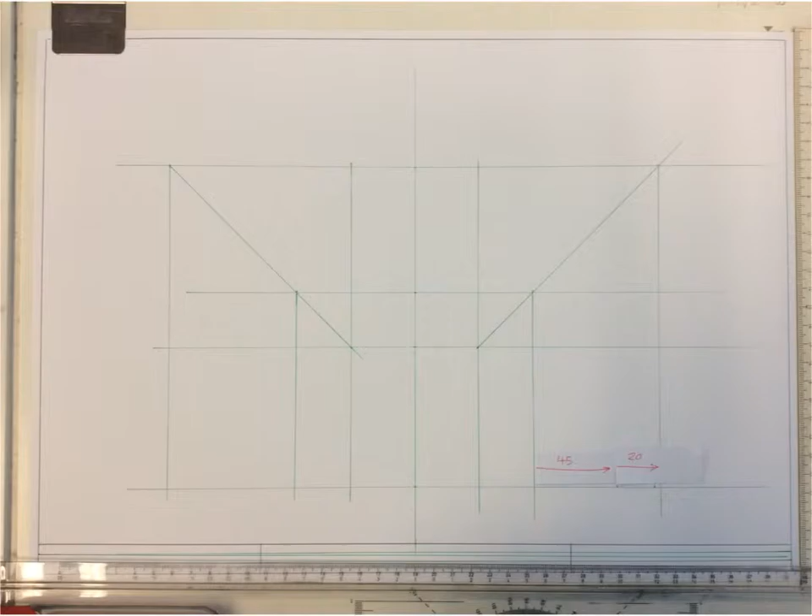Measure up the two edges 40 millimeters and 35, and then you want to draw a vertical line from that measurement there that you made initially, and then a mark up there matching your measurement down the bottom.

These angles that you're going to draw now are going to not use the T-square and set square together, but you're going to be joining up points. So you have made a mark up the edge which you need to mark off along this line here, and then you're going to join up that point and that intersection with this angled line.

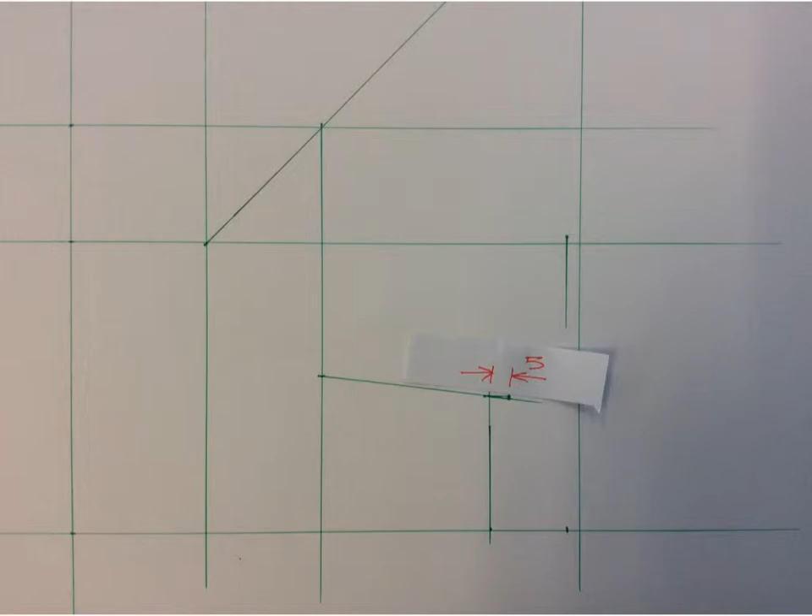And you're going to measure 5 millimeters along this line here, so that the next step is going to be joining up these two lines here. So this chair is drawn scale 1 to 10, so this 5 millimeters measurement is actually representing 50 millimeters, so 5 centimeters. So this is the width of the chair base which you would sit on, and this is the chair back.

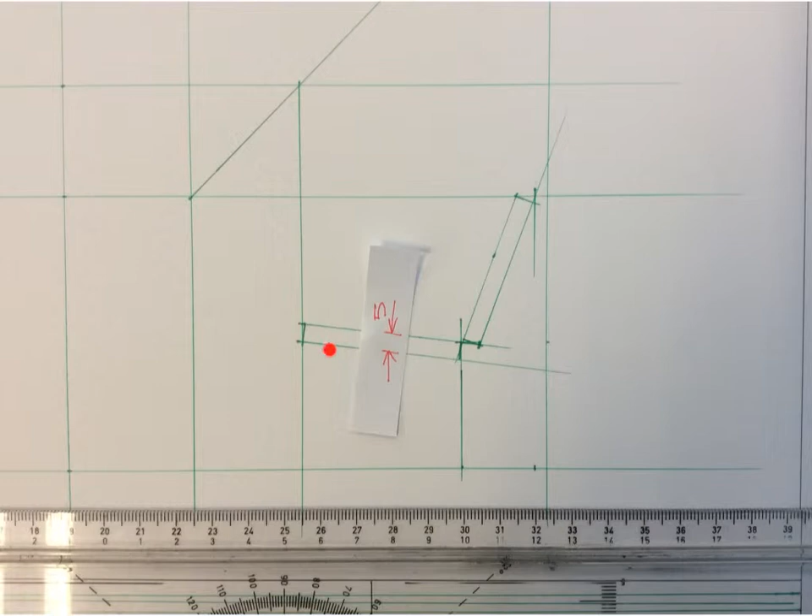So you are going to use parallel line technique with your T-square and set square together to get those lines nice and parallel, and with that trick you can also get vertical lines that are vertical off the angle, so perpendicular, which your teacher will teach you within class time.

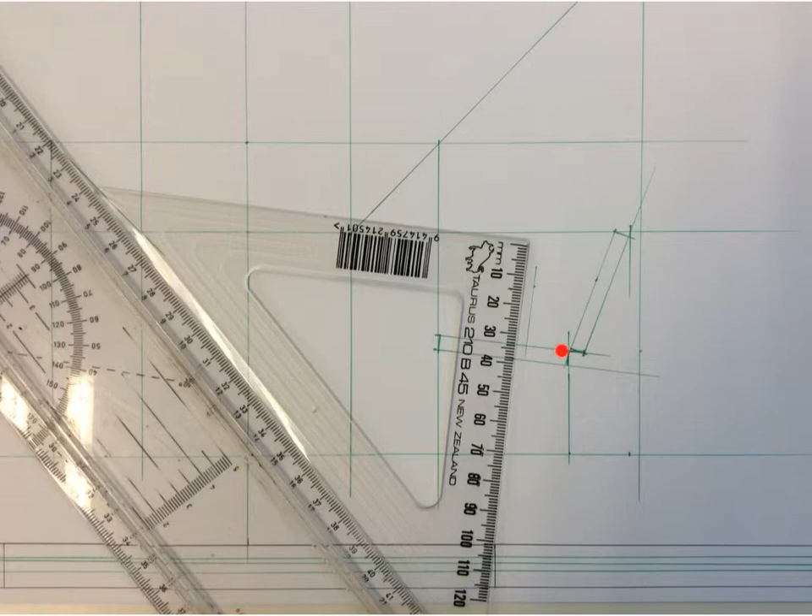Here you can see a snippet of the T-square and the set square sitting on top to give me the vertical line that is perpendicular to the angle which has been drawn here. So that is just giving me a vertical line drawn off the seat anywhere, so that then I can mark 20 millimeters off it. There's that 20 millimeters measurement, and you can see it actually marked off right there, which I'll draw another strong parallel line to the seat base.

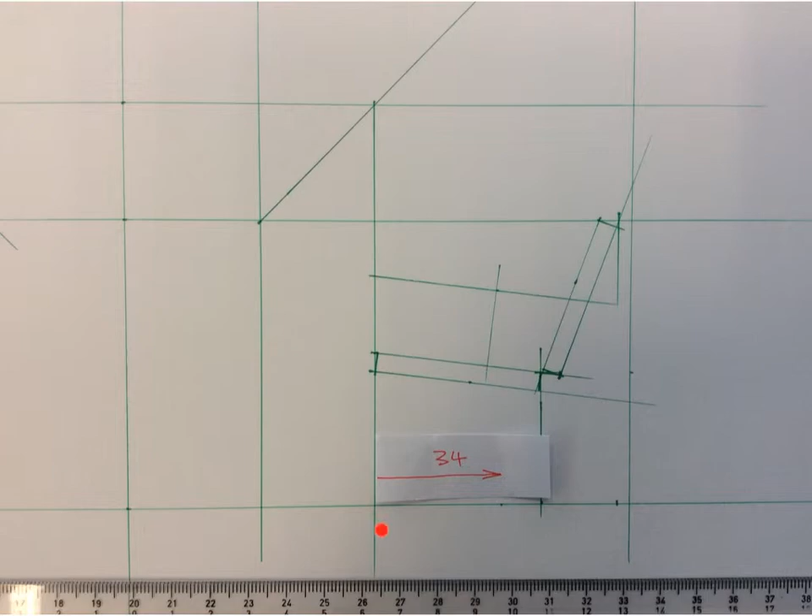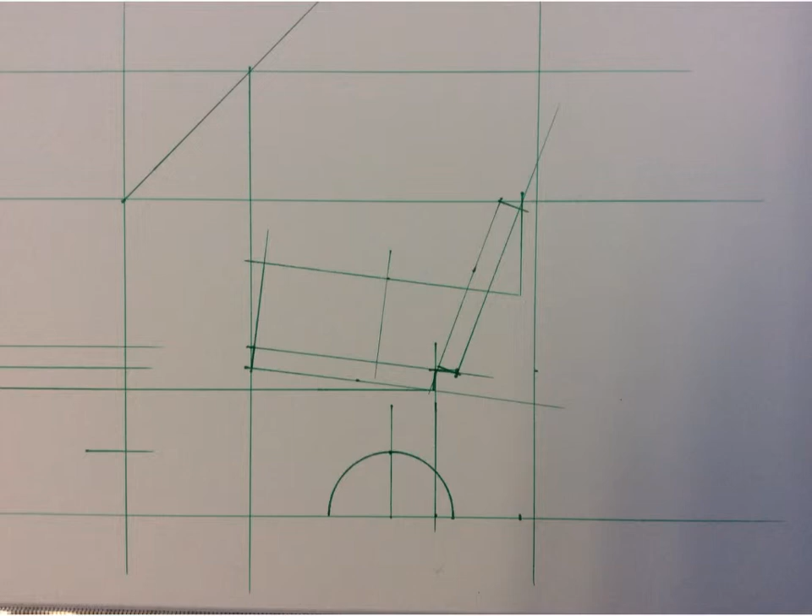Now my next step is to measure from this edge in 34 millimeters. That finds a center line which I'm going to measure 15 millimeters to the left and 15 millimeters to the right, and 15 millimeters up that center line. Those are then 3 points which I can align a circle template to draw this nice semicircle, which is of course 30 millimeters in diameter.

We're going to draw another arc, which is going to be a quarter circle around here. So we need to measure in 15 millimeters along that and 15 millimeters down along that line. This needs to be a 90-degree angle. If it isn't, you need to get your teacher to check in with you and see how you can fix up that detail, because otherwise you're not going to be able to draw a quarter of a circle within that area.

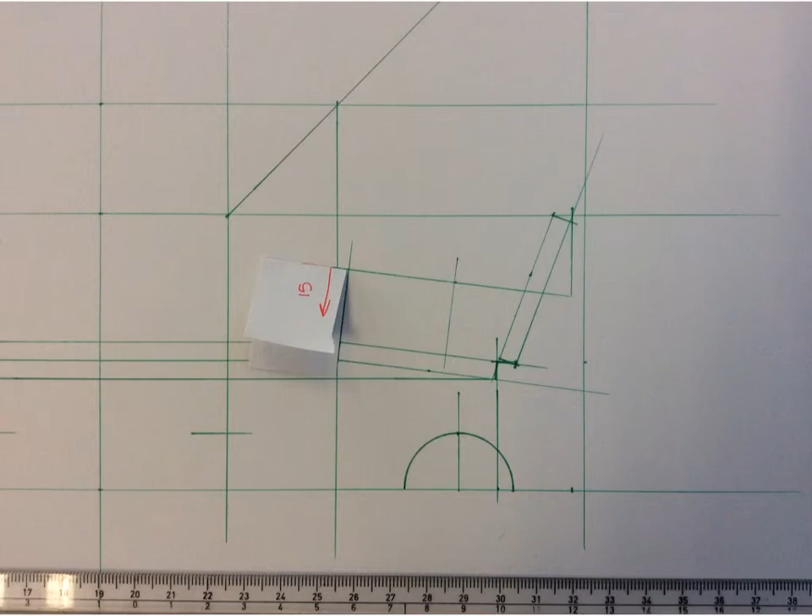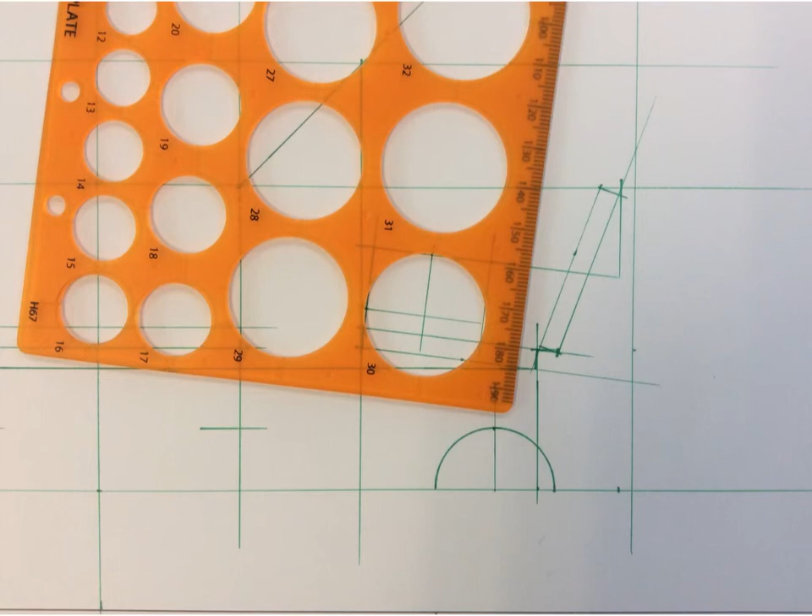Draw out perpendicular lines so that you know where the center of the circle would be, and gives you some guides to draw your center lines later. And then the next step is use the circle template. Make sure you select the right size circle, and there are notches on the circle template which you line up with your points that intersect with the box that it sits in, and you can draw your circle. And here is the curve.

So overall, this is the contour of the seat, which is some solid sides, and then sitting inside that are two surfaces which you sit on. You will see the final form in class.